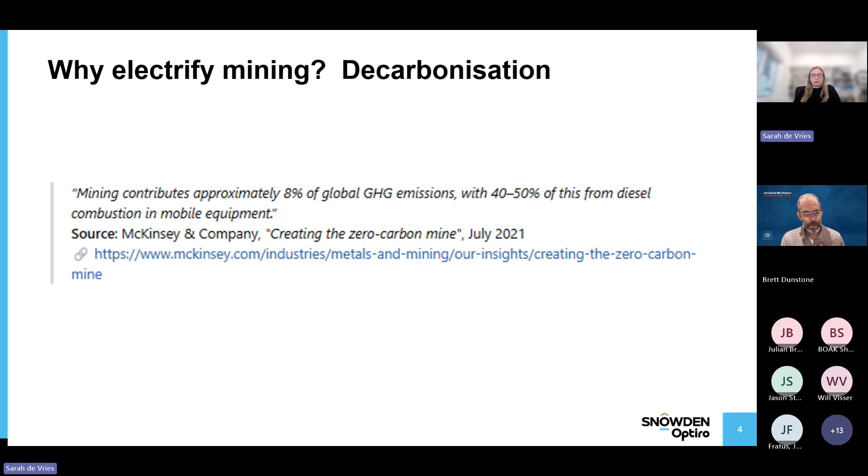Everyone's probably seen this quote—it gets tossed around a lot—but 8% of global carbon emissions come from mining, and 40 to 50% of that is from diesel combustion. So obviously the majority of that is from haulage in open pit operations. That's because we move ore and we move waste, and we usually move a lot more waste than ore. So in terms of distribution between open pit and underground, open pit is where the really big problem is. So how can we reduce our diesel usage, particularly in open pit mines?

If we look at the world as a whole, where do we actually use fossil fuels? Power generation is a big one, and particularly in the Northern Hemisphere, heating in winter, and then cooling in WA and other parts of Australia—we know a lot about cooling. Transportation is a big one, particularly road. Again, in Australia we're pretty guilty of that—we've got some massive distances to cover. And then industrial processes like smelting of ore, creating steel, etc.

So what are our alternatives to fossil fuels? The first prize for most people at the moment is renewable electricity generation. Countries other than Australia are a lot more fortunate—if we look at Canada, for example, they have a lot of hydropower, which has no carbon footprint. The same in some Southern African countries. We don't have a heap of hydropower in Australia. I assume most people are from Australia, so I am going to have an Australian focus.

In Australia, we're looking at things like solar, wind, and a little bit of hydro is being considered. Nuclear is obviously the one everyone keeps talking about—it seems to get a lot of political discussion, so everyone's got an opinion about that. But if we're looking at it from a carbon generation perspective, nuclear is actually a really good option.

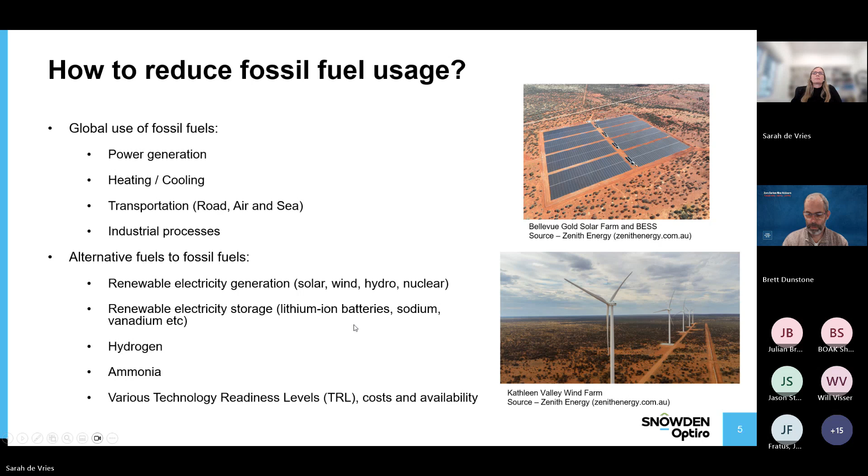So if we move away from power generation and look at actual mining operations, how can we reduce our fossil fuel use? Sorry, this is a really wordy slide, but I wanted to spell out the details. The fossil fuel power generation we've just talked about, and battery energy storage systems, are super important. The big usage is with truck haulage, particularly in open pit.

We can remove diesel consumption totally, or reduce it, by using electrification technologies that are currently available. So we've got things like in-pit crushing and conveying, where you have a crusher inside the pit, so your trucks don't have to haul very far. They dump into that crusher and then conveyors take the ore or the waste out of the pit.

Not used terribly often around the world, there's lots of constraints on that. A bit more common is EPCC, ex-pit crushing and conveying, where the trucks come out of the pit and then tip into the crusher. Rope con is another variation, I've got a picture of that later. There's also railveyor, and trolley assist truck haulage, as I mentioned earlier.

Loading equipment is another way. Diesel diggers and excavators are really easy to move around, really flexible, but they also consume diesel. So we can replace that diesel loading equipment with cable electric equipment, shovels, excavators, or even tethered underground loaders. All of these things have been around for decades.

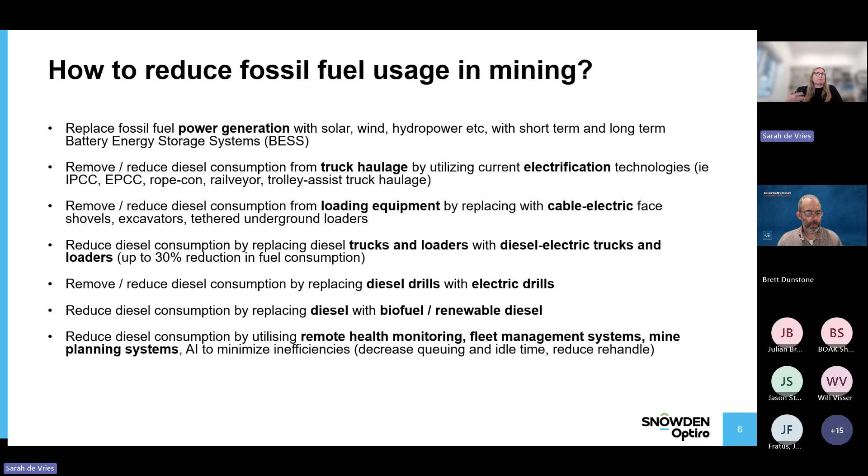So I'm going to run through all of these in a bit more detail and then talk about the new technologies, which is our battery technologies.

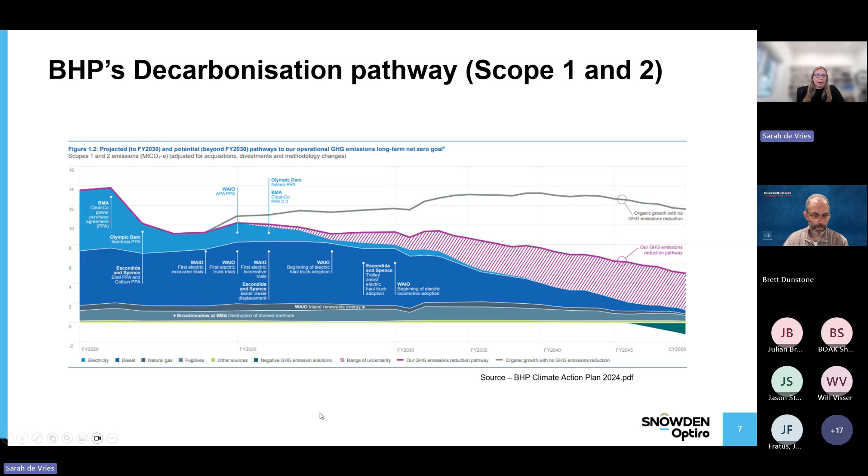Rio Tinto have gone down quite a different route, and it's not because they don't believe in mine electrification, it's because they are aware that the technology is not readily available yet and has a development period ahead of it. So they're really going for the renewable diesel approach at the moment. They've done some trials and fully implemented it at Boron, and Kennecott now are using renewable diesel. This is expensive, there's no doubt about it. We also need to be careful that we're not replacing agricultural land for food generation with diesel generation. So it's a little bit dicey in that perspective, but that's the route they're going because they can't buy electric trucks off the shelf at the moment.

And then we have Fortescue. They've gone hard the other way from Rio Tinto, and they're actually heavily investing in bringing that technology to the field and developing it. There's been some quite interesting news from Fortescue in the last few weeks - this wasn't part of my original slide, I should have said I did this presentation originally for the AusIMM Sydney branch in July, so there's been a few changes. Fortescue actually bought their own technology company, Williams Advanced Engineering, in 2022. They are a battery electric vehicle company, they race in Formula E. Fortescue purchased that company with the intention that they would develop their own battery technology to power these big 240-tonne trucks. Obviously building a battery that big is pretty complicated and hasn't been done before, so they saw the need and went out and bought this technology company.

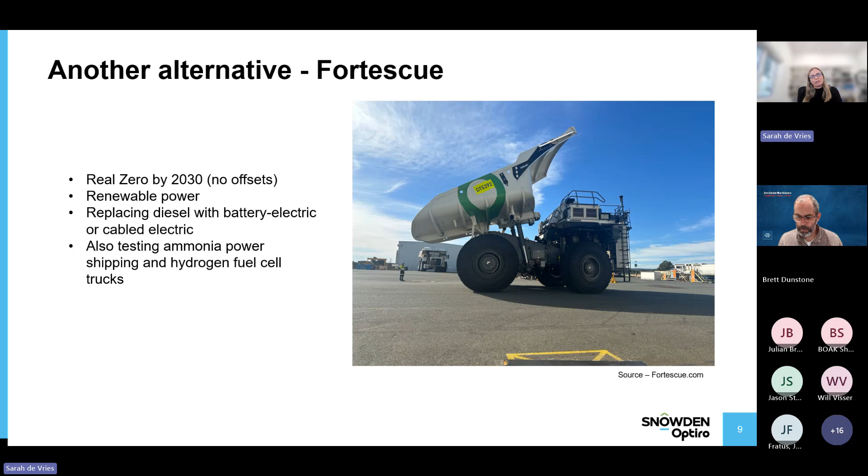They've also been testing ammonia power for shipping and hydrogen fuel cell trucks. They're replacing their trucks with battery electric trucks, and then cable electric shovels, cable electric drills, and a variety of other supporting equipment. So we've all seen their slogan of Real Zero by 2030 - they're actually making big efforts to get there and investing heavily in doing that. So there's 3 of the bigger companies and what they're doing - quite different routes. Some are a bit more safer, a bit conservative, and some are really pushing the boundary.

Moving on from decarbonisation though, there are other reasons to electrify mining. So why would we think about it? This has been a bit of a change - obviously the political environment in the US has changed in the last year, and the sustainability decarbonisation message has been a little bit muted. So people are coming back to the dollars, to the financial reasons for electrifying, and there are lots of reasons to do that. Electricity is a lot cheaper than diesel - maybe not in the Pilbara in Australia, where we're in the middle of nowhere and have to generate our own power with, at the moment, diesel or gas. But if you're in a low power cost jurisdiction, it makes a lot of sense to swap over to electric mining rather than diesel mining.

For example, when I worked in Zambia, we were getting our diesel shipped in, trucked in from the coast - we're a completely landlocked country, so getting diesel to site was actually a really big logistical exercise. Power was simpler and cheaper. On top of that, electricity is more efficient than diesel. When we run our trucks on diesel, that diesel is only about 30% efficient - we lose a lot to heat, so we're throwing our energy away there. Electric motors are about 90% efficient, so we're already making a massive saving there in terms of actual work we're getting out of our power source.

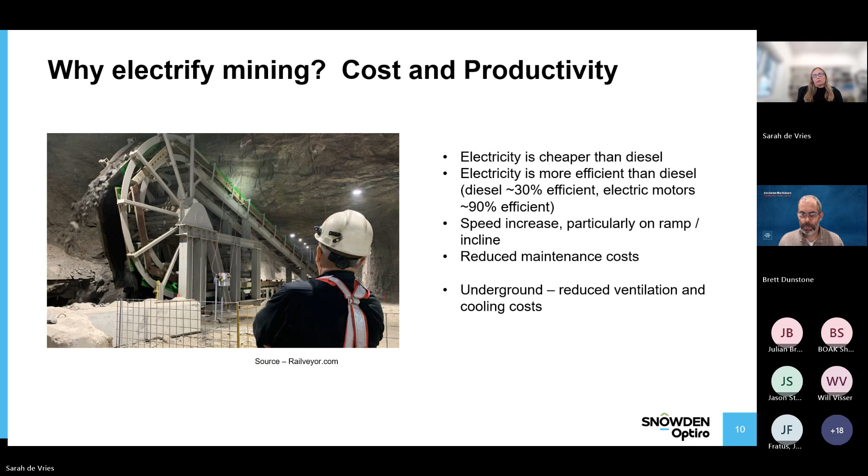On top of cost benefits, we've also got significant safety and health benefits. Working conditions improve, you're not working in the heat anymore, and the environment is much quieter. You're not getting the same whole body vibration that you get sitting in a diesel loader or truck all day long. In cases where mines are located next to towns, the reduction in noise is really important and a big plus for electric equipment.

And there's a whole heap of health benefits that you get from removing diesel, no more exposure to DPM and so on. That improves the safety and health of workers. So there are some other really good reasons apart from decarbonisation and cost.

Let's have a look at the current technologies available. For an open pit, you've got things like in-pit crushing and conveying. This is one of the in-pit crushers at Sentinel Mine in Zambia. The trucks tip in at the top, it gets crushed, and then loaded out of the pit on a conveyor. Again, Zambia is a very low-cost electricity environment, the power comes from hydropower, so it's an extremely sustainable solution for them.

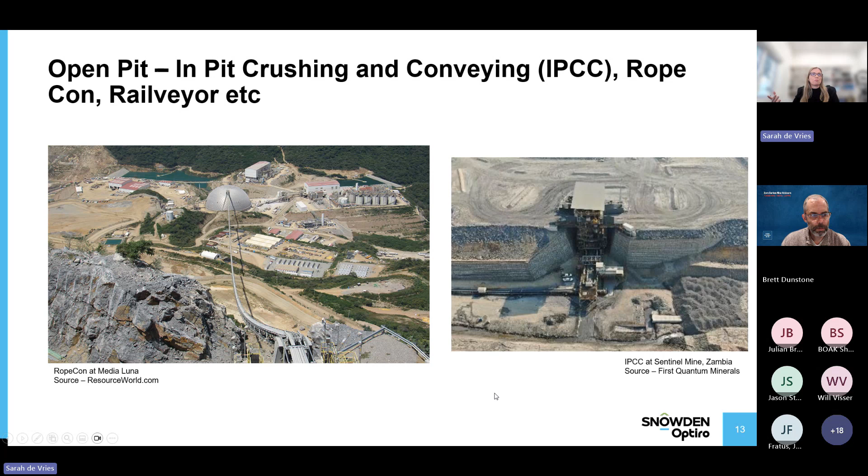This is another similar version, a rope conveyor at Media Luna mine in Mexico. The pit is up here, and it gets taken down to the plant at the bottom. Both are really good examples of current technology available for electrifying mines, removing truck haulage out of the equation almost completely.

Trolley assist is a technology that's been around for 50 or 60 years in various iterations. This is a diesel electric truck, so as it comes to the bottom of the trolley ramp, it raises the pantograph and starts drawing electric power from the overhead catenary wire. The truck then switches off the diesel motor and converts into running off electric power, getting a huge boost in speed. On diesel on ramps, you're typically running about 8 to 10 kilometres an hour, and on trolley you'll go up to about 18 to 20 kilometres an hour.

And the noise just drops away, which is quite amazing to watch. You've got this massive noisy diesel truck, and then the noise just disappears. So there are some big advantages there. The disadvantage for trolley assist is obviously you need all of that infrastructure to go in, which is costly, and there's a whole heap of supporting electrical infrastructure such as a substation, transformer, and DC rectifier required to power that line. It's not an insignificant investment to put a trolley line in.

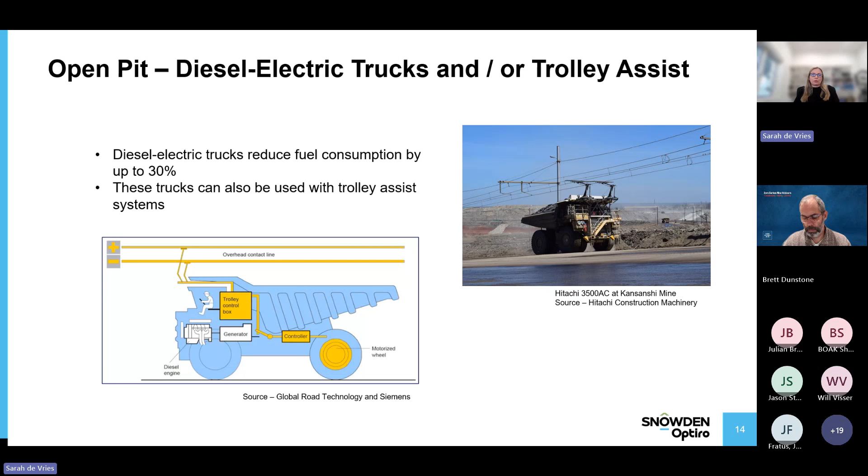There's a whole heap of other electric equipment that's been around forever. We've got drag lines in coal, electric face shovels, electric excavators, and electric production drills. So that technology is fully proven, it may just require some changes to operating practice from a typical diesel mine.

One of the big issues in the past is how to move cable around. Particularly in Australia, we don't tend to have heaps of people spare to move cables around, and this is a manual handling risk as well. So it's really good to see these cable reels coming in now to minimise that. That also helps with the old problem of running the cable over, which happens more than you would hope.

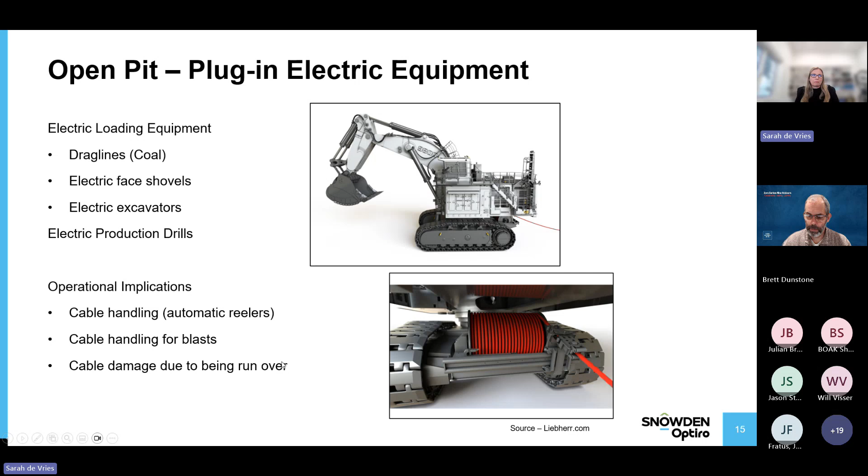There is an operational implication in that it's a bit harder to move your diggers out of the blast radius, and depending on your supporting resources to move those diggers, you can lose quite a bit of productive time moving them out of the blast radius.

Underground electrification options - shaft hoisting has been around forever. Again, very capital intensive at the start of a mine life, so you need a mine with reasonably long life and reasonably high tonnage to justify that expenditure. But that's a very effective electrification technology. Similar to IPCC, you have a crusher that breaks the ore up into a smaller size and then it gets hoisted up the shaft in skips.

Battery electric locomotives - if anyone's been to an older mine, they often used to have railway haulage loops at the bottom running off lead acid batteries. Tethered electric loaders have also been around for, I don't know, 20 or 30 years. You can see the cable reeler on the back there. Typically used in large quantity fixed routes, such as transferring from the bottom of an ore pass into a crusher.

And then you've got trolley assist haulage. Kiruna trucks, again, have been around for a long time - they were at Mount Isa. This is actually quite a funny story from a decarbonisation perspective. The trolley assist would run on the ramp, and then they had a very small battery that allowed them just to go off the ramp to get loaded. They were eventually replaced with diesel, those batteries, to expand the tramming distance that was possible. So yeah, that's a reverse decarb decision.

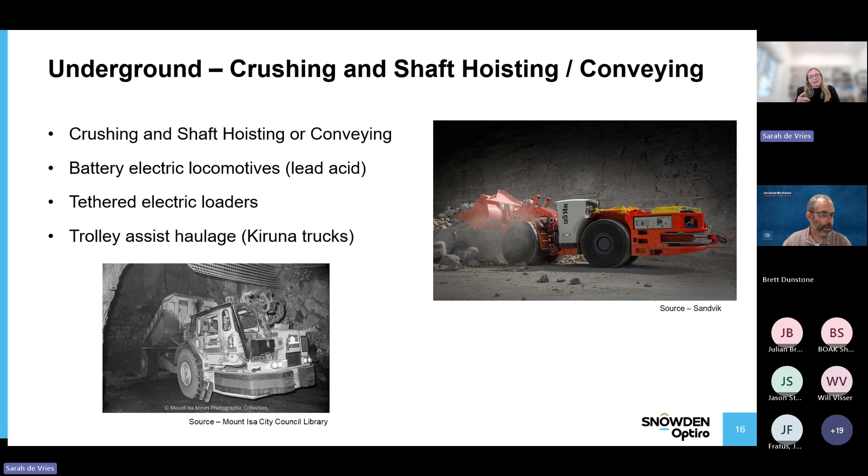So what are our new technologies? Lithium-ion batteries - battery electric vehicles are becoming much more readily available. We're seeing it on our roads now, probably not so much in Australia, but certainly places like China, they're becoming very, very common. Why is that happening?

You can see on this graph how the price of lithium-ion batteries has come down since 2010. That's a really quite astounding cost change in that time. And now you can see as well in China how the pricing is comparing to internal combustion engines.

So from a mining perspective, why are battery electric vehicles now becoming a possibility? Cost is coming down, as I said. The capacity and range is increasing - Sandvik, one of our main underground OEMs, are already up to their 3rd generation battery. The battery capacity increased about 35% with the last iteration, expanding the range of these vehicles and making them more suitable for most operations.

The other big advantage of battery electric vehicles is the fact that power is generated by braking. And because we're in a battery electric vehicle, we can actually store that power back to the battery. So in addition to being far more efficient than diesel, we're actually generating some power as well, which is very cool.

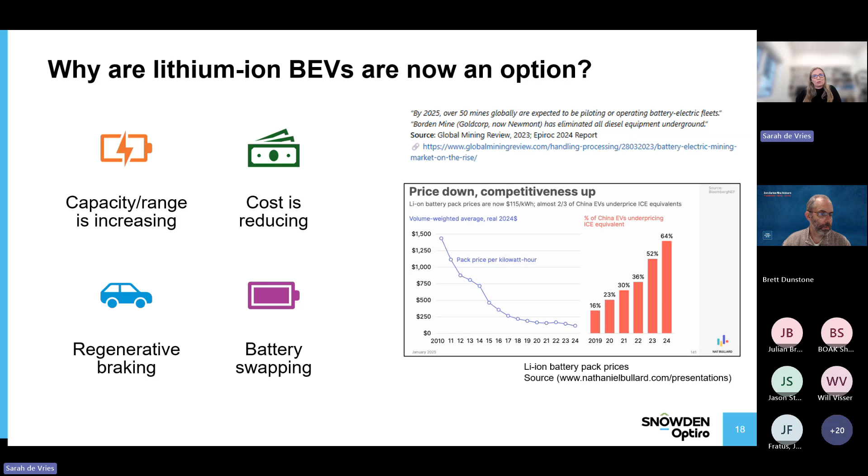I just want to quickly talk about battery chemistry, because everyone seems to get hung up on different battery chemistries as being more or less safe than others. I think it's important to realise that chemistry is not the only component of safety, and choosing a chemistry for a battery underground is based on a whole heap of other factors as well, like specific power and energy, cost, lifespan, and performance.

For our haulage equipment, you're looking at either lithium iron phosphate or NMC batteries, and they're both used. Epiroc haulage uses NMC, and Sandvik uses LFP. So it's really just important to realise that chemistry is not the only component of safety, and you'd actually make that choice based on a whole variety of reasons.

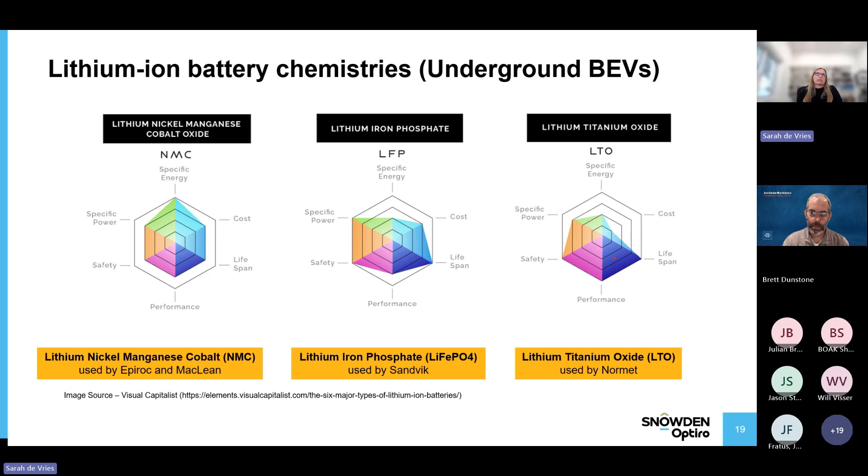On safety, I'm going to preempt this because it's the first question that generally comes up - I did a talk yesterday and it was the first question: what about battery fires underground? It's important to realise that the batteries we're using underground are not like the batteries we've got on our electric scooters or skateboards. These are very highly engineered with multiple levels of safety protecting those batteries. I'm not aware of any cases that were not due to human error of thermal runaway in battery electric vehicles underground.

It is very true that once a battery goes into thermal runaway, it is very difficult to put out - it needs to be drenched in water for 24 hours at a minimum. So yes, there is a concern there. But I think we need to realise that there are multiple layers of safety protecting those batteries. It's not to say there's not a risk - there's absolutely a risk.

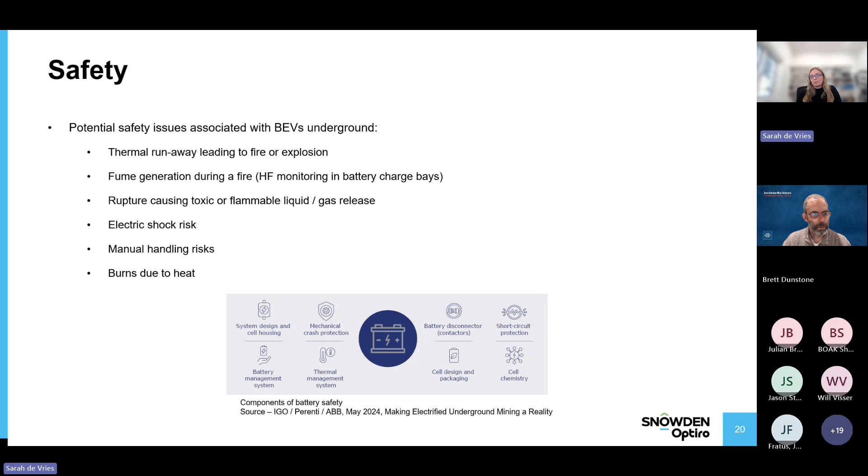BEVs are far less likely to catch fire than diesel equipment. For anyone who's been involved in a diesel fire underground, it's a really horrible experience. So the fact that we reduce that likelihood of that happening is really important.

So BEV trucks - this is the Sandvik 50-ton truck. As I mentioned earlier, you've got increased speed on grade. I don't think you're going to get up to 100% speed increase on an underground mine, but I'm certainly hearing stories of 50 to 70% speed increases on ramps, which is awesome. Loaders have a faster dig speed, so you're getting a time advantage there, saving power to your battery, and reducing your maintenance costs.

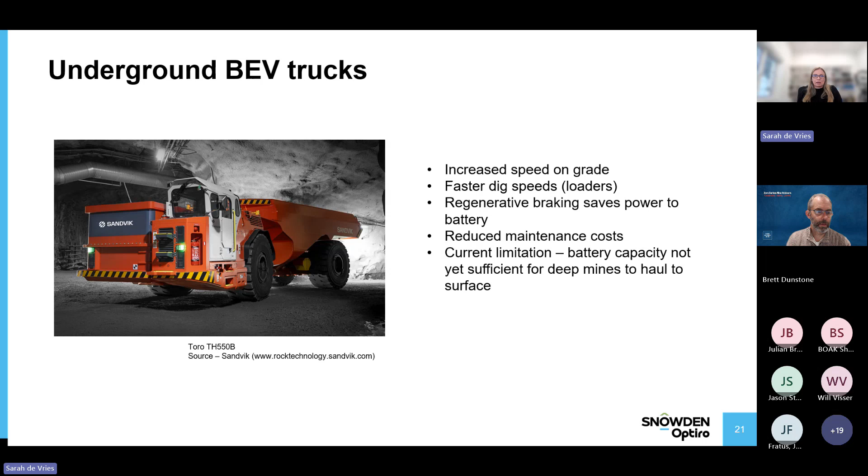The main limitation at the moment is battery capacity is not large enough to allow haulage from very deep mines. If you've got a reasonably shallow mine, say 400 to 500 metres below surface, that's perfect for battery electric trucks. If you've got an 800 or 900 metre deep mine, you won't be able to haul all the way to surface on one charge. But if you've got a mine that deep, I would hope you'd be looking at things like conveying or hoisting anyway.

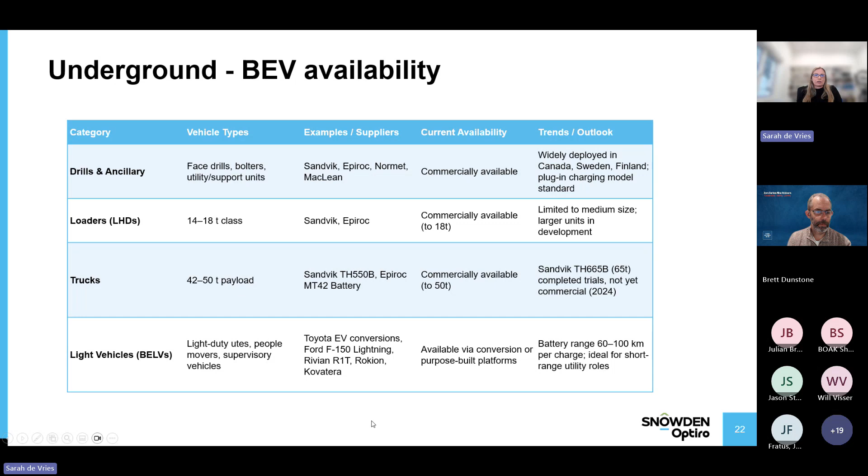I won't go through this slide in detail, but it's just to show you that you can basically, if you wanted to, set up a fully electric underground mine right now. All of those different equipment types are available commercially. They may not be available as quickly as diesel equipment - the lead time is a little bit longer - but there are multiple mines around the world now that have placed orders for fully electric fleets, and they're implementing them at the moment, which is really exciting.

The other big benefit, as I mentioned earlier, is ventilation and cooling. By removing diesel from our underground environment, we're removing that exposure risk. DPM, diesel particulate matter, is a class 1 carcinogen, and we should be making all efforts to remove that and remove people's exposure to it. The Safe Work Australia limits are dropping by a factor of 10 at the end of 2026, so apart from minimising our workers' risk to their health and safety, it is actually going to be a regulatory limit as well.

I won't go into ventilation too much, but at the moment, one of the main ways we work out how much ventilation we need underground is based on the amount of diesel equipment we have underground - we have a factor of generally about 0.05 cubic meters per second per kilowatt of engine capacity. So if we don't need to dilute those diesel fumes and emissions anymore, we can actually, hopefully, lower our primary and secondary ventilation quantities. Obviously, it depends on the specific mine.

If you've got a very hot mine, you might not be able to reduce it as much. But if you can reduce the size or the number of primary vent raises that you need, that's a very significant cost saving, and it can quickly offset the increased capital cost of BEVs.

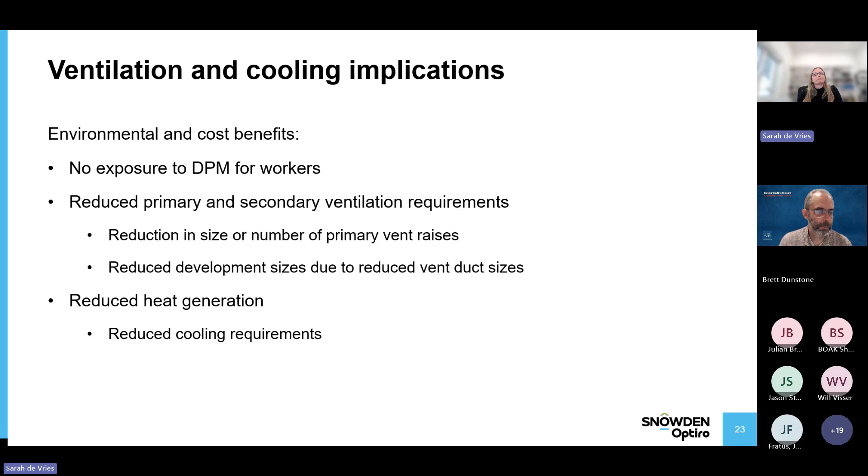Open pit BEV trucks. Battery electric trucks are very common in China and Southeast Asia at the moment, but these are the small size trucks, 70 to 90 ton trucks, and they're working really well. That's just a sign of how the battery technology has developed so quickly in China. They're not yet available commercially in the sizes that we typically use in Australia, our ultra class trucks.

So prototypes are being tested by Caterpillar, Komatsu and Hitachi. Same with Liebherr, but again, they're not developing the batteries - they're going to be supplied by Fortescue. These trucks are massive, these batteries are massive. It's a really ambitious undertaking to put batteries in these big trucks. So the state of technology readiness is still very, very low - we're really at the prototype testing stage.

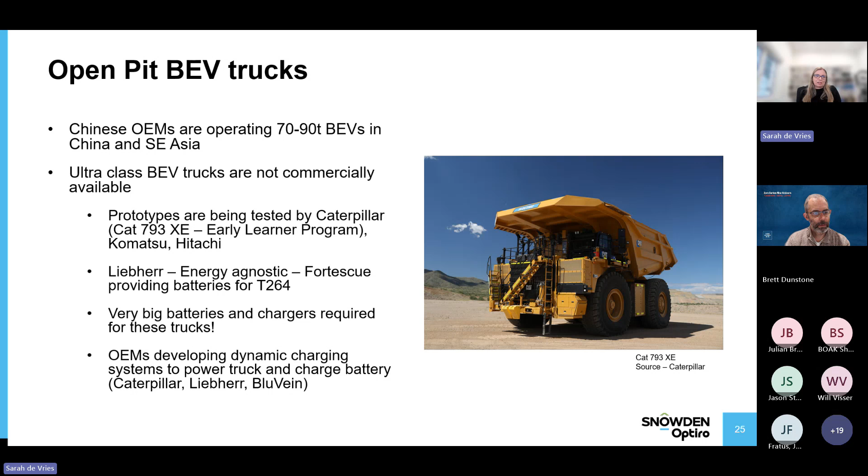I think given that a lot of the OEMs are now realizing that the ideal solution is not to have such huge batteries. If you can run off trolley assist or the various variations of dynamic charging that some of the OEMs are developing at the moment, there's two advantages to that. One is you can power your truck directly, and you can also recharge your battery for times when it's not attached to your trolley line or your dynamic charging line, without having to stop and statically charge. So dynamically charging your truck means that you don't lose that operating time standing still and charging.

There's other technologies around biodiesel, hydrogen fuel, ammonia, but yeah, they seem to be not developing anywhere near as fast. But keep aware of those technologies as time goes on.

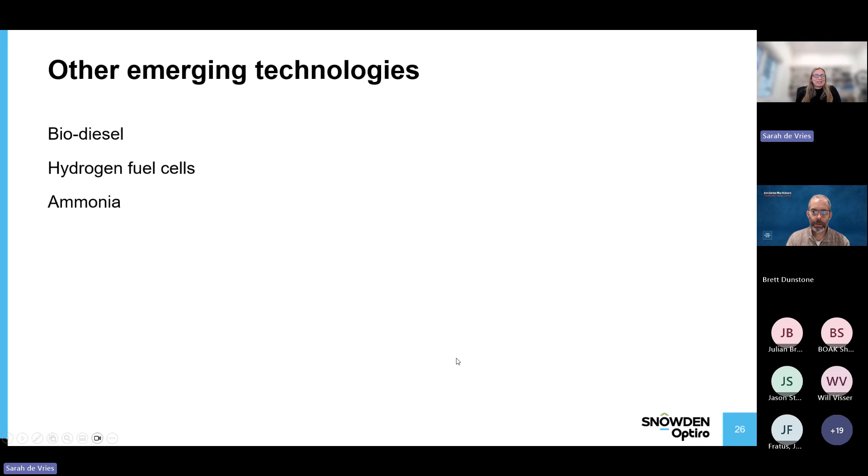Infrastructure requirements. So for all the miners in the room, we're used to just putting diesel in our truck and off we go, and we don't have to think too much about it. We'd fuel up once a shift, once a day, depending on our haul cycles, and we only lose sort of 10 to 15 minutes out of the day. So it's not really a big deal for us - we don't have to think about it too much.

Typically an underground mine would only have one diesel refueling bay. You are going to need more than that for charging. So we're looking at an expanded footprint in terms of development, electrical infrastructure, electrical power, and ventilation.

There's definitely a cost involved there. And I mentioned earlier that both underground OEMs have set up their trucks and loaders to be able to swap their batteries rather than statically charge them. Sorry, correction — Epiroc, you can either battery swap or statically charge, fast charge, whichever one you like.

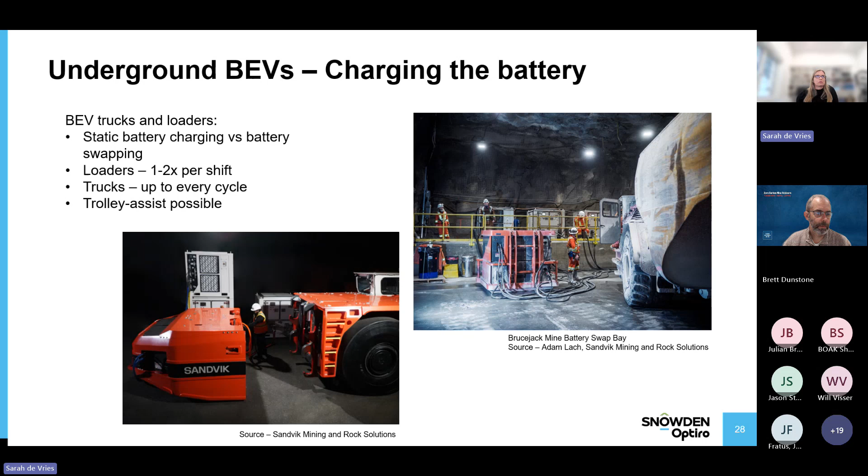And BEVs — Fortescue have publicly said they're going to need to charge their batteries about every 4 hours on their 240-tonne trucks, and that charging will take 30 to 35 minutes. So despite the speed increases, you can see that you're going to start losing a really large chunk of your day to charge those trucks.

So first prize is to dynamically charge those trucks while they're moving. That's really the big trend we've seen in the last year coming from the OEMs, looking at dynamic charging options. Caterpillar and Liebherr have both got dynamic charging options. I'm sure most people have heard of BluVein, a really exciting charging technology being developed in Brisbane at the moment. And then you've also got your traditional trolley assist. All of those options are going to coordinate really well with battery electric vehicles to charge.

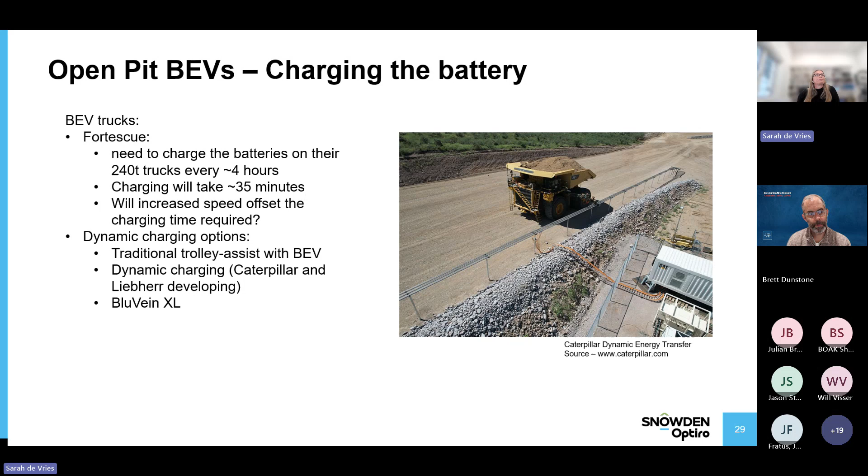So when it comes to infrastructure, I've talked about charging and swapping stations. I think the big thing for open pit in particular is power availability. So even if you manage to remove diesel from your operations, you're then going to have to compensate and supply additional electrical power to those operations. So we're looking at a large increase in the power requirement at your site.

So can you even produce that much power for islanded mines? Or can you draw that extra power from the grid? Is the power available? The other very big issue for traditional diesel open pit mines is electrical distribution.

If you're running a diesel operation in the Pilbara, you probably don't have power lines running everywhere. The mines I worked at in Zambia were set up to be electric mines, and they had a really good distribution network set up for the trolley assist and the electric diggers. But many diesel mines, particularly in Australia, have power running to their plant and administration area, and that's it. So if you're running a very spread out mine, you're going to have to put a lot of power lines in. There's a big cost involved in that, a big labour availability issue, and a skilled labour availability issue involved in that.

Generally not as much of an issue for underground. Underground mines are established with a big distribution network because we need it to run our jumbos and our production drills. So not as much of an issue for underground.

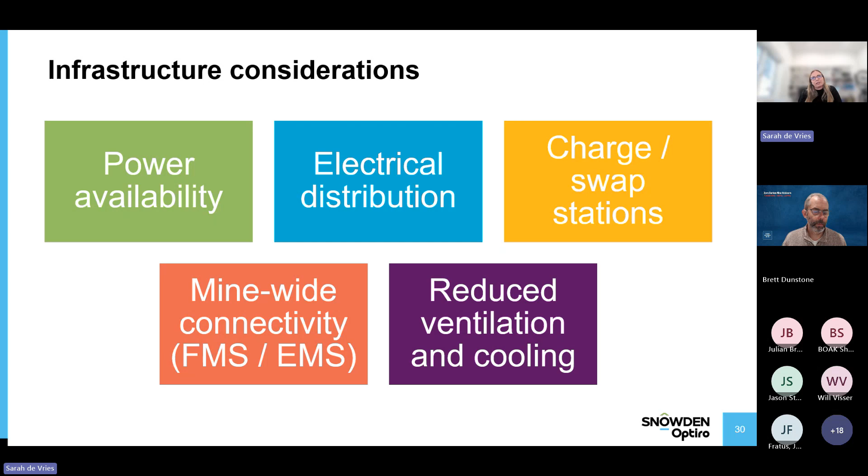And I guess on the other side, we can reduce our ventilation and cooling infrastructure for underground. So that's a positive.

What is it going to cost? It's not going to be cheap. I can't give you truck prices for open pit because you can't buy them yet. For underground, you're looking at almost double to buy a battery electric truck or loader compared to a diesel one. And that's before you even look at the cost of the battery, and these batteries are going to be very expensive.

Both Sandvik and Epiroc are offering what they call battery as a service, where they retain ownership of the battery and look after the servicing of it. One of the interesting things about batteries is they don't last forever, depending on their use cycle, and they will need to be replaced. So there's an additional cost there that you don't have with a diesel piece of equipment.

So that's battery as a service. Those costs are really significant at the moment, I think, because battery technology is new, and I believe OEMs aren't that sure about how well their batteries are going to last. For the Cosmos study that I worked on, it was about 30% of the maintenance cost was actually just battery as a service. So it was very expensive.

So yeah, everything's expensive at the moment, but if you can save, say, $50 million by dropping a ventilation raise out of your vent design and mine design, you can actually quite quickly cover the cost. And I think it's really important to realise that your total cost of ownership should be lower over the whole life of the asset. And I think these prices will look very different in the next 3 to 4 years because battery prices are coming down so quickly.

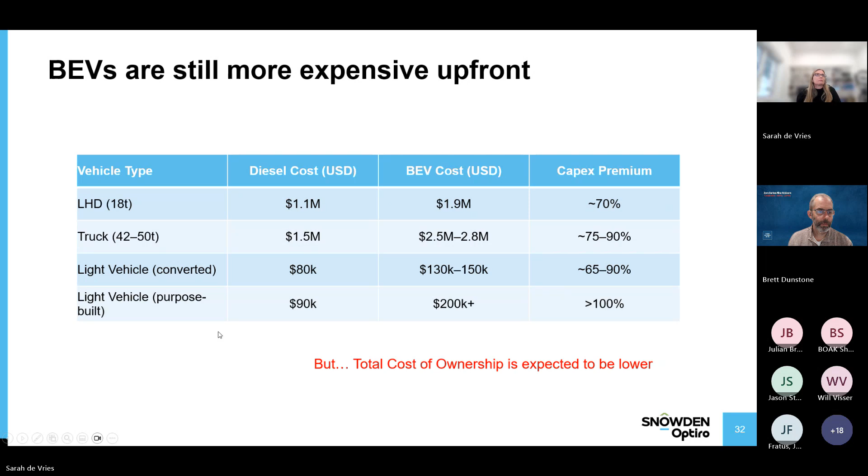I won't go into this in detail because I can see I'm talking for too long again, but these are all the things you need to consider when you're doing your financial evaluation. And I just want to point out that it is very mine dependent. If you've got a really hot mine, it probably makes a lot of sense financially to look at electric equipment. If you've got a shallow mine that's not that hot, maybe not.

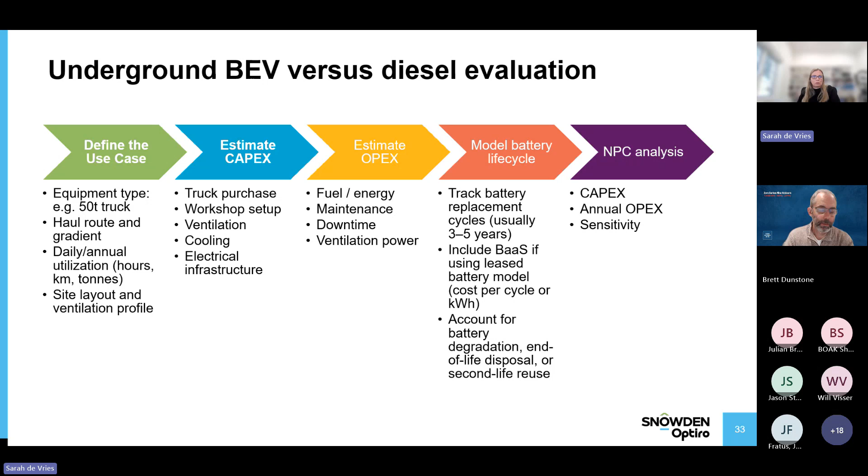But yeah, if you can save a lot of money on ventilation and cooling, then financially, it could be a really good decision. And this is before we bring in the cost of decarbonisation, carbon pricing, etc., and achieving your company's decarb goals into the equation. This is a straight dollars comparison.

So what's the conclusion of all of this? Our traditional electrification technologies are suited to low power cost, high production rate, long life mines, but they really do limit your flexibility. BEVs, which is our new mining technology, combine the flexibility of diesel with the environmental and cost benefits of those traditional electrification technologies.

So underground BEVs have been in use for over 10 years now in Canada, and you can commercially buy BEVs to replace all diesel equipment underground. The main capability limitation at the moment, as I mentioned, is trucks. So if you have a deep mine, you're not going to be able to manage that full haul to surface on one battery. And as I said, capacity is going to keep increasing and the costs are going to keep coming down.

So underground BEVs are quite an attractive option at the moment. Open pit BEVs, we're still some time away from being able to go and buy a battery electric truck off the shelf. I've said 5+ years there. I'd probably push that even more at the moment. Yeah, things aren't moving as quickly as we all hope they would.

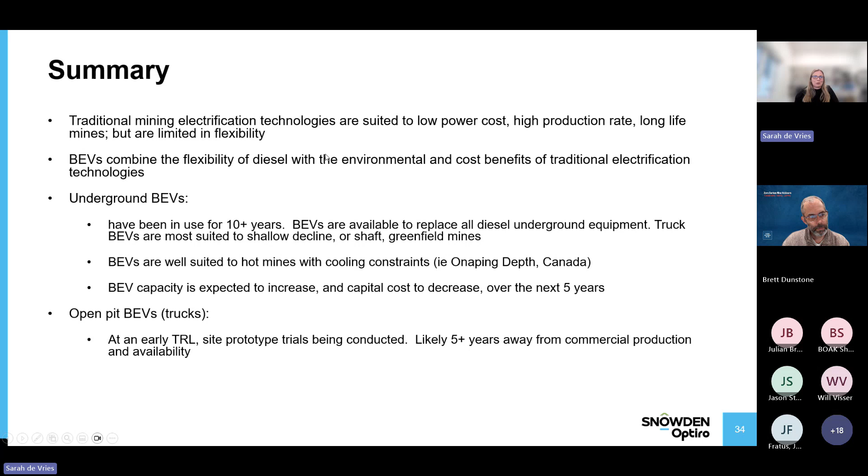But what can you do to electrify your mine and save diesel consumption at the moment? Utilize all those tools you have already, your fleet management system, your planning system, even AI is starting to make a big splash. Run your mine efficiently and reduce your diesel usage. Even little things like road maintenance, making sure your roads are smooth and minimizing that rolling resistance - all of these things can pay off.

I think we just need to be aware of underground BEVs. There aren't any mines that are fully electric in Australia yet, and there have been a number of trials of electric equipment done in Australia, but none permanently operating that I'm aware of. But particularly if you're looking at setting up a new mine or a new ore body, just be aware of the possibility of BEVs and include it in your initial studies, because it may make a big financial difference as well as a decarbonisation difference to your operation.

And it's a case of doing the right thing. I think for workers' health and safety, we've got a regulatory and an ethical responsibility to our workers to provide them the best possible working environment, the safest possible working environment that we can.

BEV trucks are not yet available for open pit, but diesel electric trucks are. So if you're looking at purchasing a new truck fleet, consider diesel electric. It's going to save you fuel and be better for the environment as well.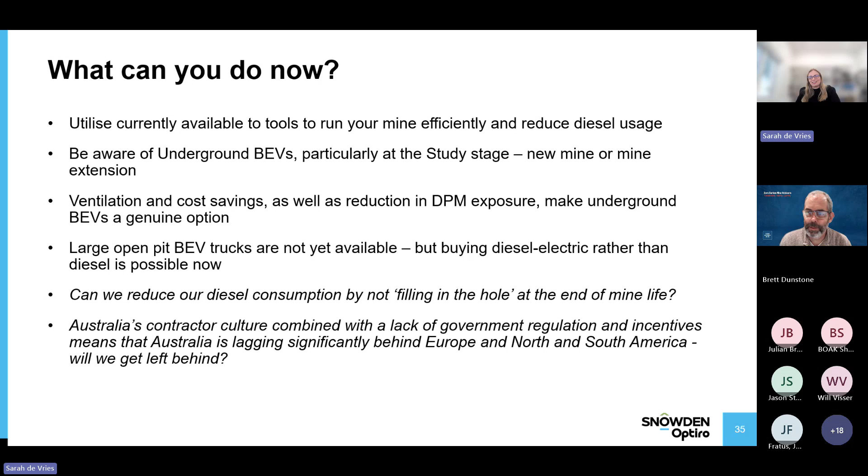Thanks, Sarah. I think there was a couple of questions as we went through there.

Yeah, I think one question, Jason, was - you're talking about out of the box thinking - sort of saying, if automation of haulage trucks can be done, could you see large numbers of smaller electric trucks changing the paradigm? I know there's work being done. I think, is it Volvo, that swarm sort of technology? Is there, how much interest or work is going on in that sort of side of things?

I think people are looking at it, but there is a reason that we went to bigger trucks in the first place. But yeah, it is changing the trade-off now. So if you need to throw 8 or 10 tons away in battery weight, and that reduces your payload, that might change your economic calculation as to what size trucks you want. I didn't talk about automation in this talk, but electrification and automation obviously have a huge amount of synergies. So it's something that needs to be considered going forward.

If you're going to go to the whole exercise of electrifying your fleet, why would you not automate it at the same time? Because it might make it a lot easier to manage.

Yeah, a lot of just making it all work more efficiently, like you were saying, automated, sort of taking the human error out of things.